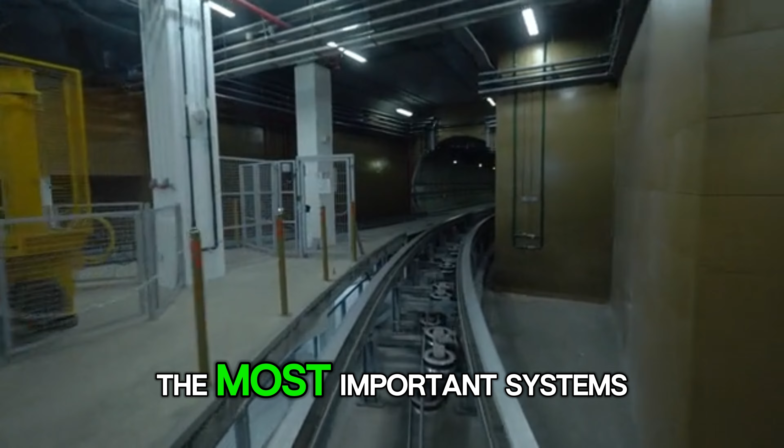Most people think they understand how modern countries develop. They see tall buildings, fast trains, massive factories, and assume that progress is mainly about speed and visibility. But real national-scale engineering does not work like that. The most important systems are often the ones people never notice, systems that operate quietly in the background, supporting everything else without asking for attention.

China's greatest engineering achievements do not always rise into the sky. Many of them run across land, beneath cities, through mountains, and under extreme environmental conditions, working continuously without pause. This video is about one such impossible mega-project, a project that was not built to impress the world, but to keep an entire nation functioning.

China is a country of extremes: extreme population density, extreme industrial demand, and extreme geographical imbalance. Some regions are packed with people, cities, and factories, while other regions hold the resources that those cities depend on. For decades, China tried to manage this imbalance using conventional infrastructure. Roads were expanded, rail networks were multiplied, and transport capacity was increased again and again.

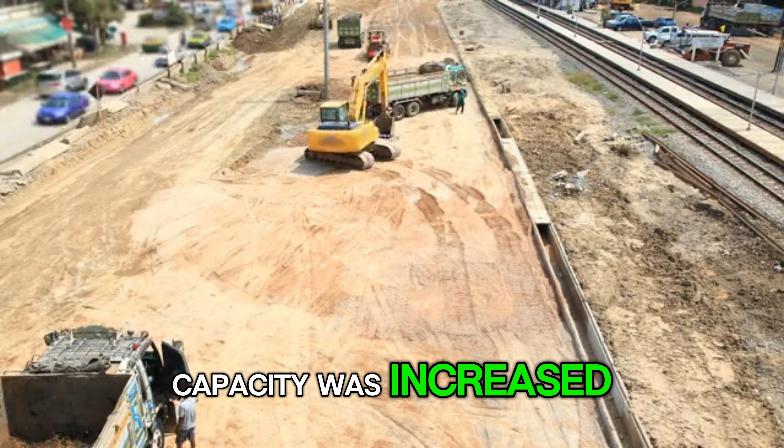But there is a hard limit to how much traditional transportation systems can scale. Trucks consume fuel, trains require schedules, and surface transport is vulnerable to weather, terrain, and congestion. At a certain point, adding more vehicles does not solve the problem. It only makes the system more complex, more fragile, and more expensive to maintain.

This is where Chinese engineers reached a critical realization. The problem was not speed. The problem was discontinuity. Resources were moving in batches instead of flowing continuously. Every stop, every delay, every transfer point introduced inefficiency and risk.

What China needed was not faster transport, but a completely different way of thinking about infrastructure. Instead of asking how to move more resources, engineers asked how to create a system that never stops moving at all, a system that behaves less like transportation and more like a permanent operating organ of the country.

Designing such a system is incredibly difficult because continuous systems do not tolerate failure. A truck can break down and be replaced. A train can be delayed and rescheduled. But a continuous national-scale system must operate every second, day and night, year after year. Even a brief interruption can affect millions of people and cause cascading economic damage.

This meant that the project could not be designed using normal engineering standards. Every assumption had to be questioned, and every component had to be built with worst-case scenarios in mind.

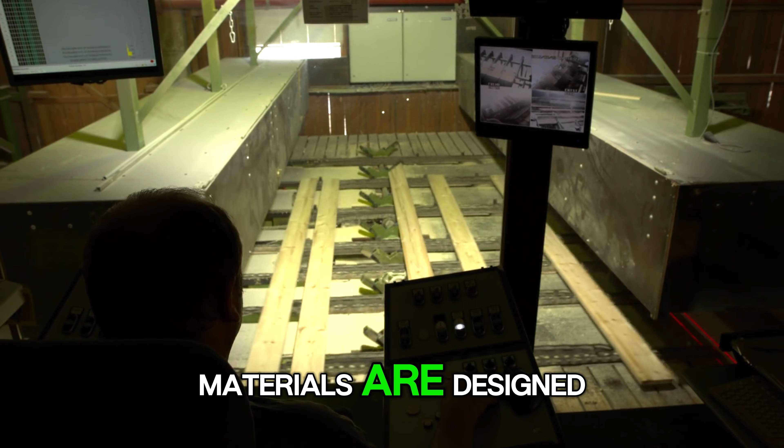One of the first challenges was materials. Standard construction materials are designed for average conditions and scheduled maintenance, but this system would operate under constant stress. Temperature changes would cause expansion and contraction. Ground movement would introduce mechanical strain. Long-term operation would create fatigue that accumulates slowly but relentlessly.

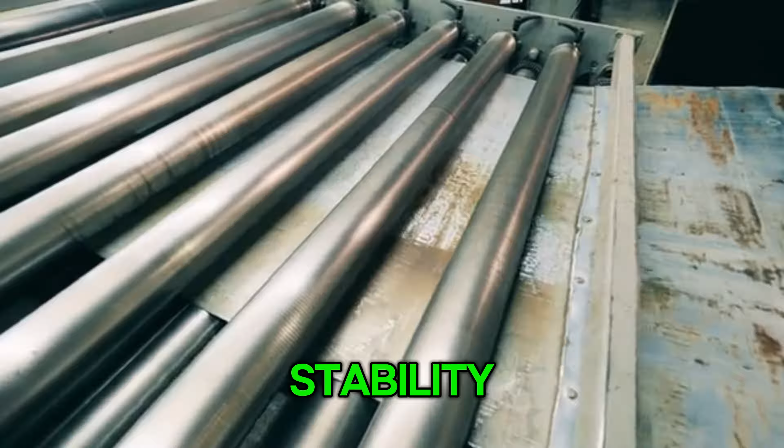Chinese engineers responded by developing custom material standards. Steel alloys were selected not only for strength, but for fatigue resistance and thermal stability. Concrete mixes were adjusted to reduce micro-cracking under repeated stress cycles. Protective coatings were layered to resist corrosion, chemical exposure, and abrasion over decades of use.

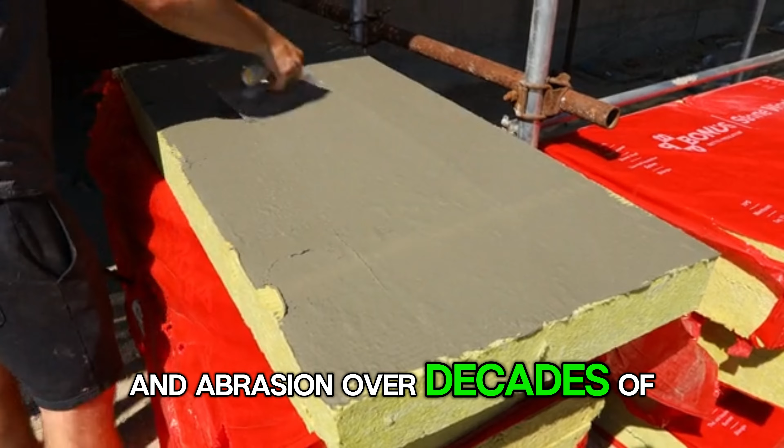Material selection alone was not enough. Structural design had to account for the fact that the system would cross vastly different environments. In some regions, it would pass through deserts, where temperature differences between day and night are extreme. In other regions, it would pass through mountainous terrain where geological stability cannot be guaranteed. In densely populated urban areas, the system would have to coexist with existing infrastructure, buildings, and daily human activity.

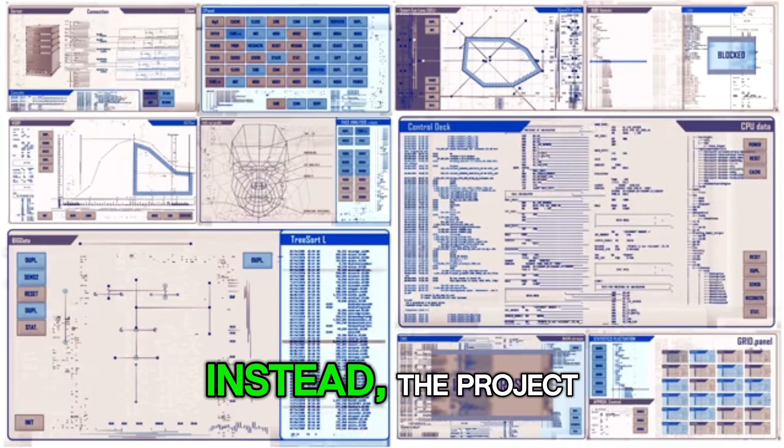There was no single design that could work everywhere. Instead, the project became a collection of localized engineering solutions, each adapted to its specific environment, all integrated into one continuous system. Construction itself became a national-level logistical operation.

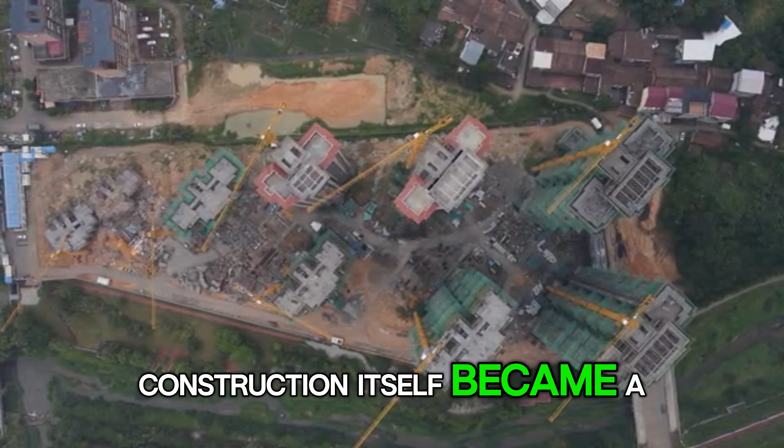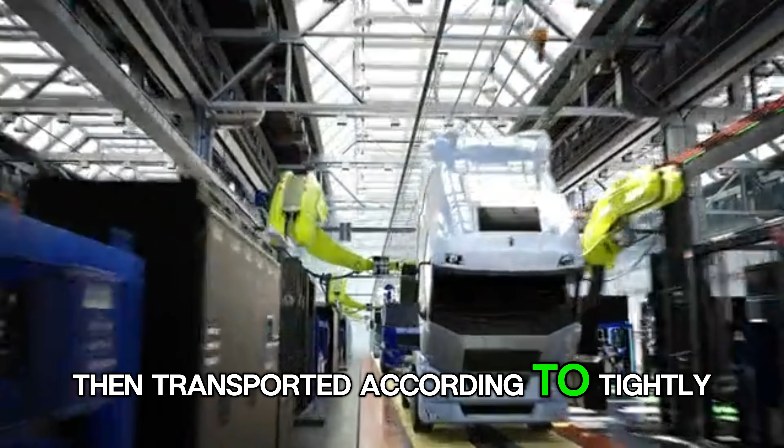This was not a single construction site with a clear beginning and end. It was hundreds of sites operating simultaneously, often hundreds of kilometers apart. Components were manufactured in controlled facilities to ensure precision, then transported according to tightly scheduled logistics plans. Installation followed strict sequences because one section depended on the completion and alignment of another. A mistake in one location could introduce stress or inefficiency that propagated across the entire system. Coordination between engineers, manufacturers, and construction crews had to be flawless.

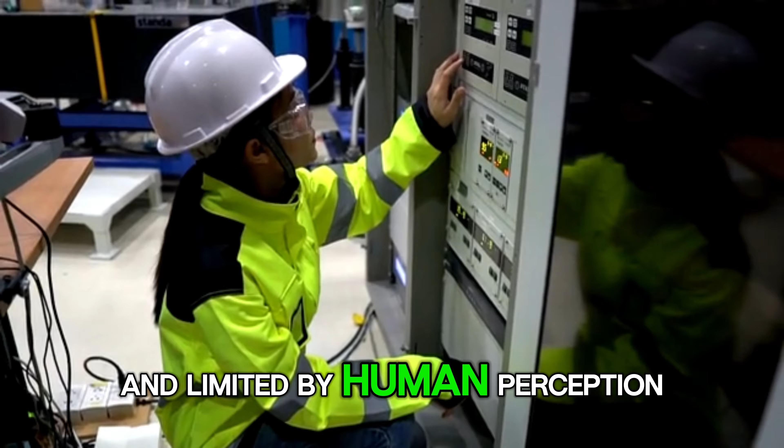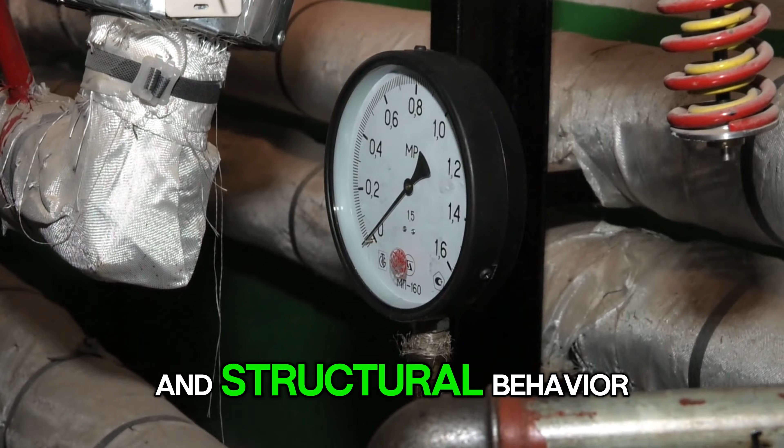Even after construction, the system could not rely on traditional inspection methods. Manual inspection is slow, expensive, and limited by human perception. Instead, China embedded monitoring technology directly into the system itself. Sensors continuously measure pressure, temperature, vibration, and structural behavior. This data is transmitted in real time to centralized control centers, where engineers analyze trends rather than waiting for visible failures.

The goal is not to react to problems, but to predict them before they become dangerous. This approach turns infrastructure into a living system, one that is constantly observed, evaluated, and adjusted. What makes this project truly remarkable is not any single technical feature, but the philosophy behind it.

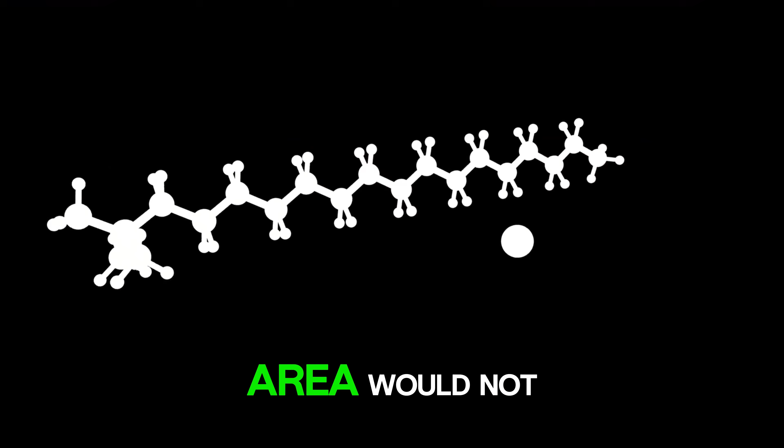China did not treat this as a construction challenge. It treated it as a long-term systems problem. Every decision was evaluated not just for initial cost, but for lifetime performance, reliability, and resilience. Redundancy was built into critical components so that failure in one area would not bring down the entire system. This level of redundancy is expensive, but at national scale, downtime costs far more than prevention.

This impossible mega-project represents a shift in how modern nations think about infrastructure. It is not designed for visibility or prestige. It is designed for endurance. It is designed to operate quietly, efficiently, and continuously, supporting everything else without drawing attention to itself. And that is precisely why most people never notice it. But without it, the visible achievements of modern China simply would not be possible.

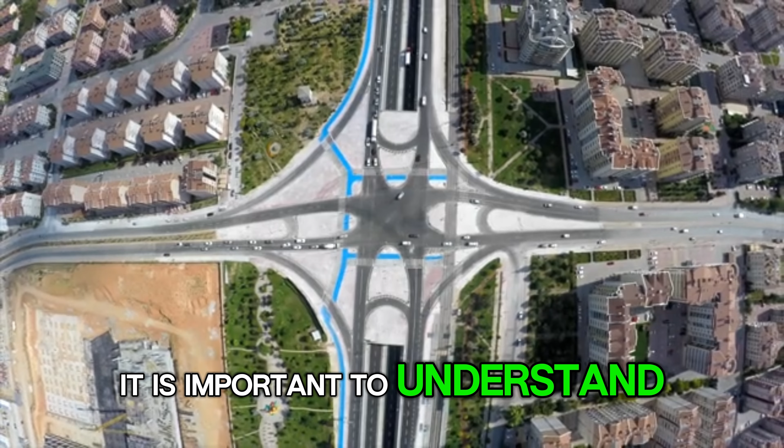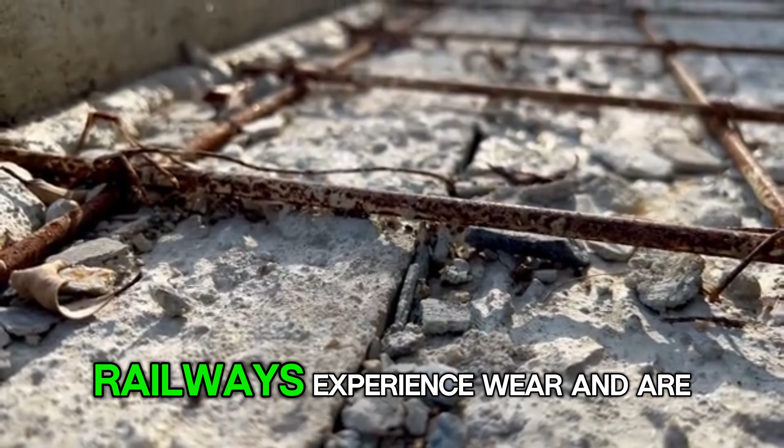To understand why this mega-project could not be built using conventional methods, it is important to understand how normal infrastructure is designed. Most infrastructure around the world is built with the assumption that problems will occur and that those problems will be fixed later. Roads develop cracks and are repaired. Railways experience wear and are shut down for maintenance. Power systems experience outages and are restored. These systems are designed around interruption.

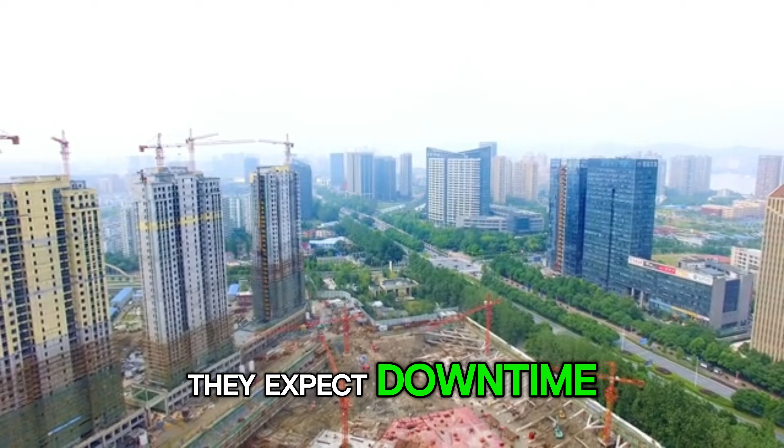They expect downtime. China's project could not afford that luxury. Interruption was not an acceptable outcome. This single constraint changed every engineering decision from the ground up.

One of the most difficult aspects of designing a continuous national-scale system is dealing with uncertainty. Environmental conditions are never perfectly predictable. Temperatures fluctuate. Ground shifts slowly over time. Materials age. When infrastructure is small, uncertainty can be managed locally. But when a system stretches across vast distances, uncertainty accumulates. Small deviations become large problems.

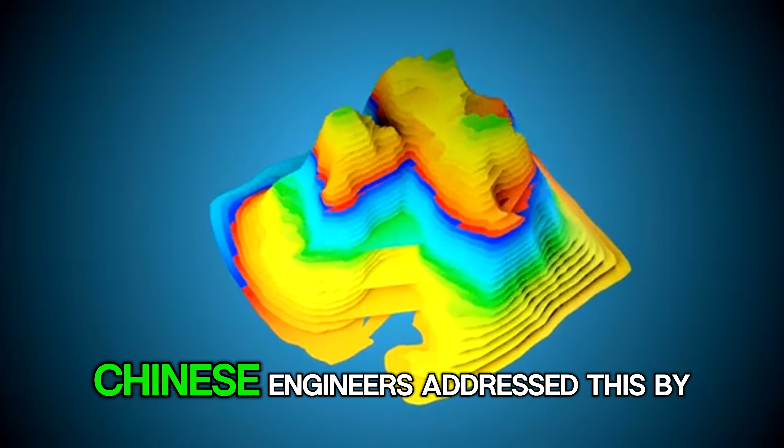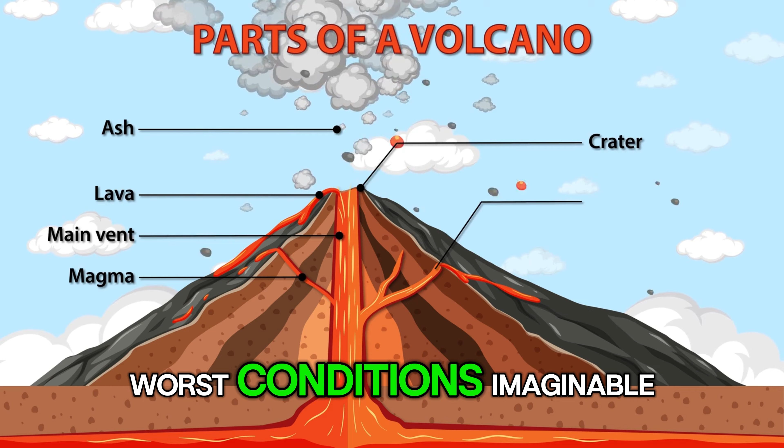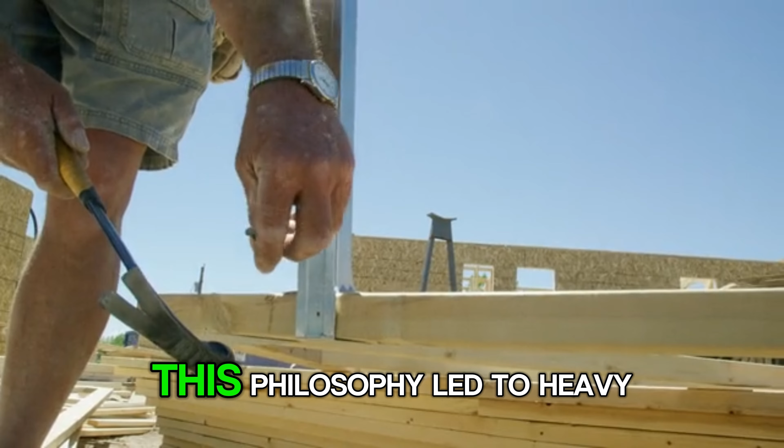Chinese engineers address this by designing for extremes rather than averages. Instead of asking how the system would behave under normal conditions, they asked how it would behave under the worst conditions imaginable. Earth movement, heat waves, prolonged stress cycles, and long-term material fatigue were treated as baseline assumptions, not rare exceptions. This philosophy led to heavy over-engineering in many areas.

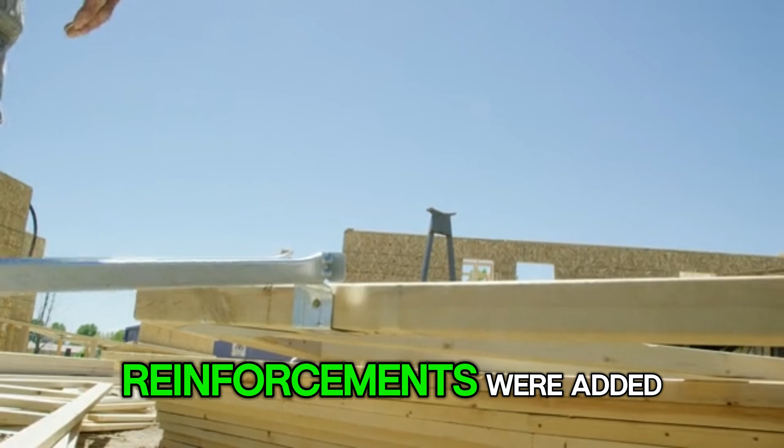Components were designed with safety margins far beyond what would normally be considered economical. Thicknesses were increased. Reinforcements were added. Joints were redesigned to allow controlled movement instead of rigid resistance. This approach increases initial cost, but it dramatically reduces the probability of catastrophic failure. In systems where failure can disrupt an entire nation, prevention is always cheaper than repair.

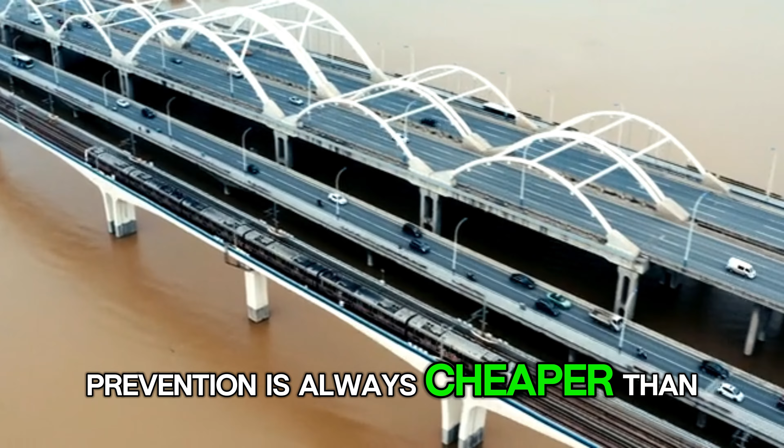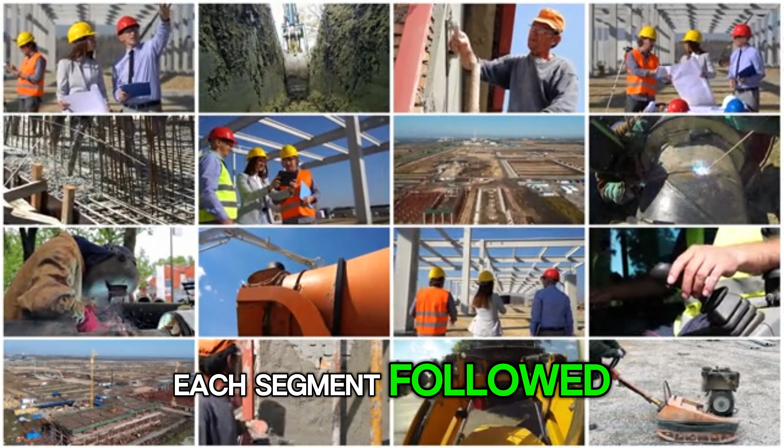Construction planning became as important as engineering design. Because the project spanned enormous distances, construction could not proceed linearly from one end to the other. Instead, it was divided into segments that could be built simultaneously. Each segment followed identical engineering standards, but local conditions required local adaptation. Construction teams had to operate with a high degree of autonomy while still maintaining strict alignment with the overall system design. This balance between central control and local flexibility is extremely difficult to achieve, and it required an unprecedented level of coordination.

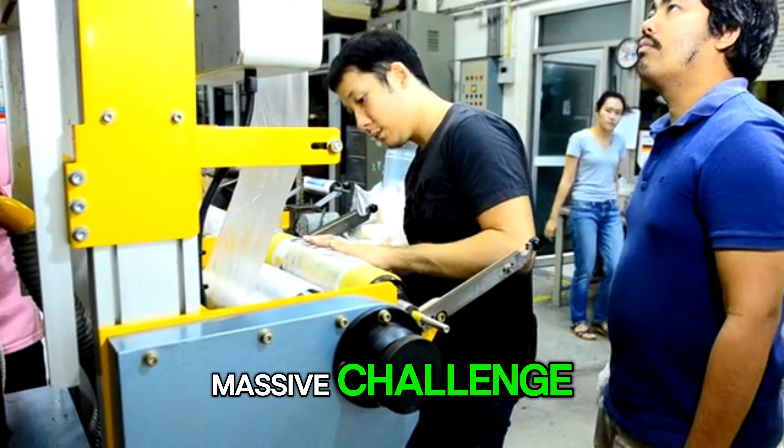Logistics posed another massive challenge. The materials used in this project were not standard off-the-shelf components. Many were custom manufactured to precise specifications. This meant that supply chains had to be carefully synchronized with construction schedules. Delivering components too early created storage problems. Delivering them too late caused delays that could ripple across the entire system. In harsh environments, such as deserts or remote mountainous regions, even basic logistics like fuel, water, and worker accommodation became complex engineering problems in their own right.

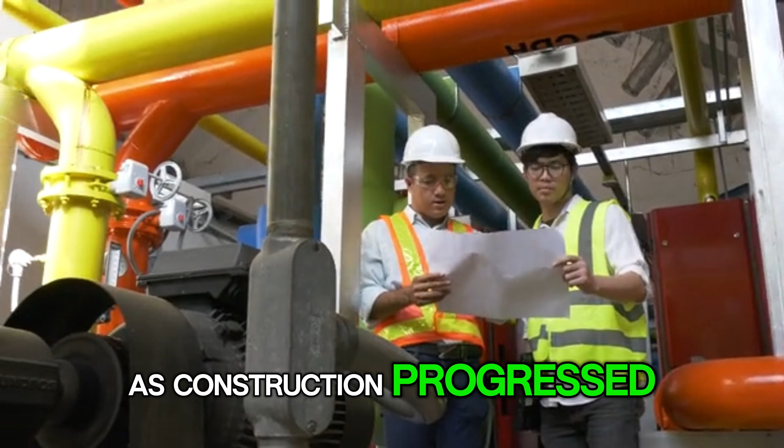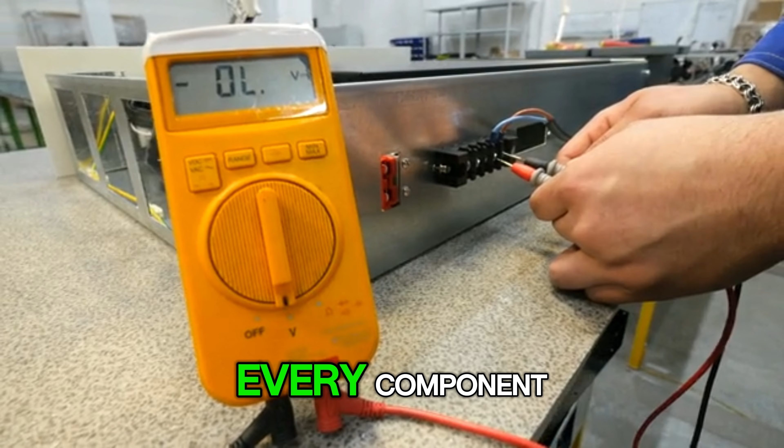As construction progressed, quality control became a central concern. In smaller projects, defects can sometimes be tolerated or corrected later. In these systems, defects could not be allowed to accumulate. Every component had to meet strict performance criteria before installation. Inspection processes were integrated directly into construction workflows.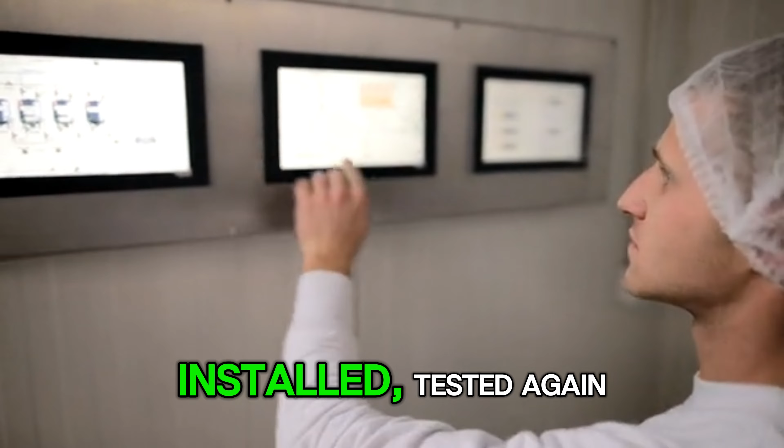Components were tested, installed, tested again, and monitored continuously from the moment they became operational. This level of scrutiny slowed construction, but it ensured long-term reliability.

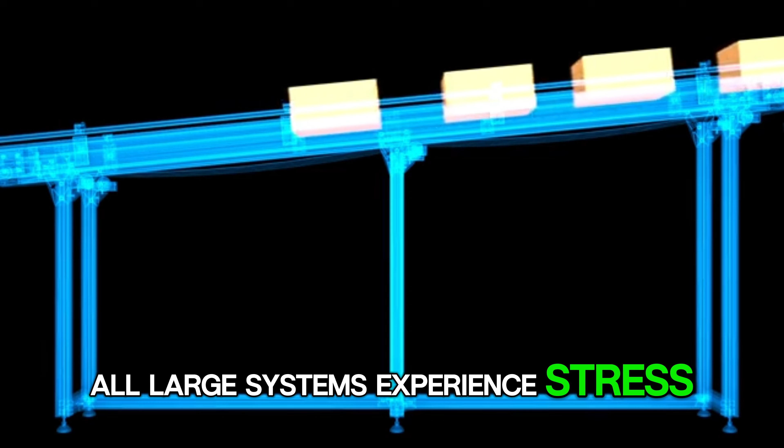One of the defining features of this project is how it handles stress. All large systems experience stress, whether mechanical, thermal, or operational. The question is not whether stress exists, but how it is managed. Instead of attempting to eliminate stress entirely, Chinese engineers designed the system to distribute stress evenly.

Flexible elements absorb movement. Expansion mechanisms accommodate temperature changes. Structural continuity prevents localized overloads. This approach reduces the likelihood of sudden failure and allows the system to age gracefully rather than deteriorating rapidly.

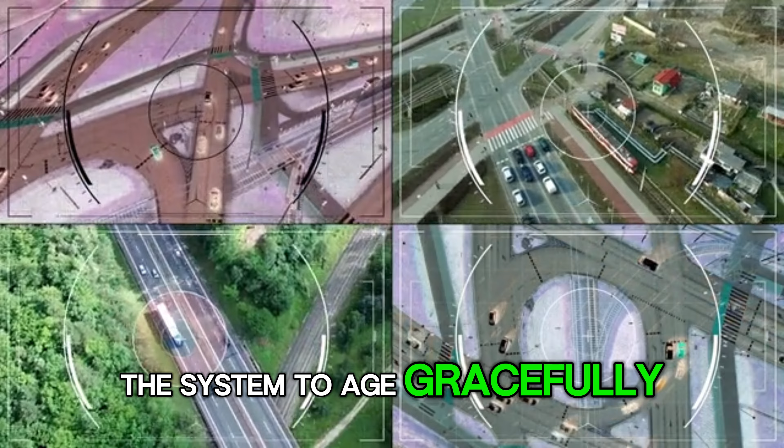Automation plays a crucial role in maintaining this balance. Human operators are excellent at making complex decisions, but they are not well suited to continuous monitoring over long periods. Machines, on the other hand, excel at detecting small changes that humans might miss.

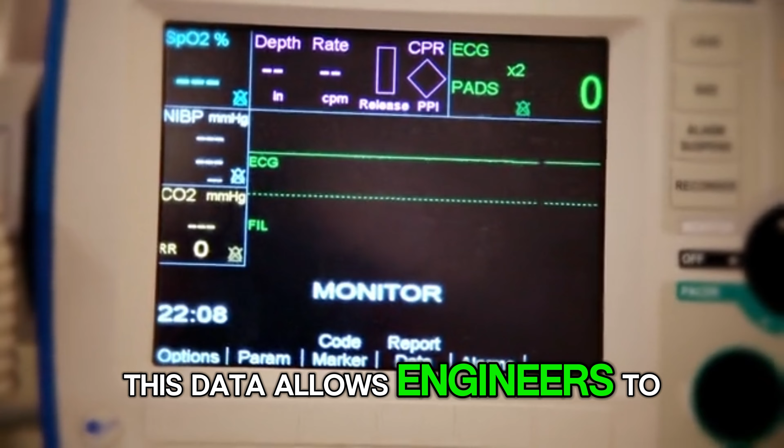By embedding sensors throughout the system, engineers created a constant feedback loop. The system continuously reports its own condition. Pressure variations, temperature shifts, and structural responses are all tracked in real time. This data allows engineers to intervene early, often before any visible problem appears.

However, automation alone is not enough. Data must be interpreted, and interpretation requires expertise. Control centers staffed by engineers analyze incoming information and make strategic decisions.

Maintenance is planned based on predictive models rather than emergency response. This shift from reactive to proactive maintenance is one of the key reasons the system remains stable over time. Problems are addressed while they are still small, preventing them from escalating into failures.

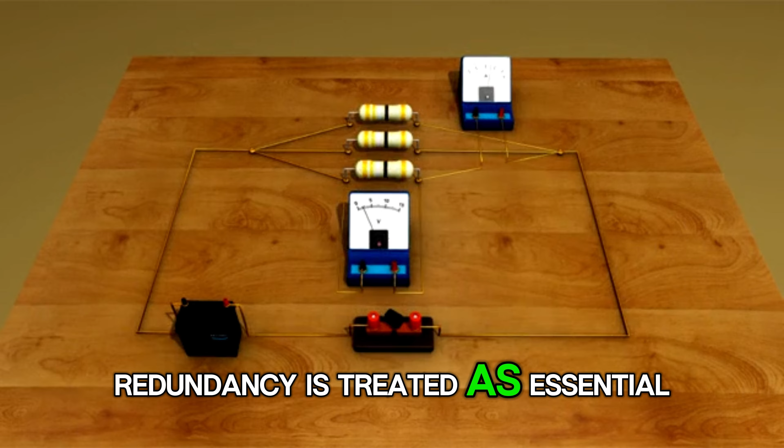Redundancy is another critical feature. In conventional infrastructure, redundancy is often limited due to cost constraints. In this project, redundancy is treated as essential. Critical components are duplicated. Alternative pathways exist to reroute flow if necessary.

Control systems are backed up by independent systems. This means that even if one part of the system is compromised, overall operation can continue. Redundancy increases complexity, but it dramatically increases resilience.

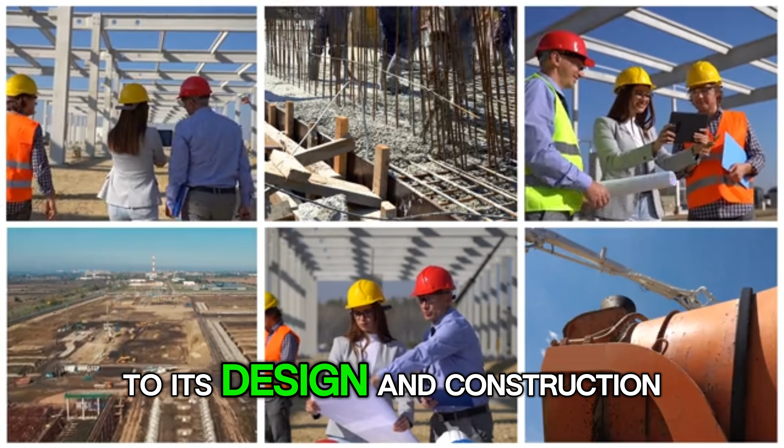What is often overlooked is the human dimension of this project. Despite its scale and automation, it is not a purely mechanical system. Thousands of engineers, technicians, and planners contributed to its design and construction. Their experience informed countless small decisions that never appear in official documentation.

Choosing one material over another, adjusting a design to account for local conditions, anticipating a problem before it becomes measurable. These human judgments are embedded throughout the system, even though they are invisible once construction is complete.

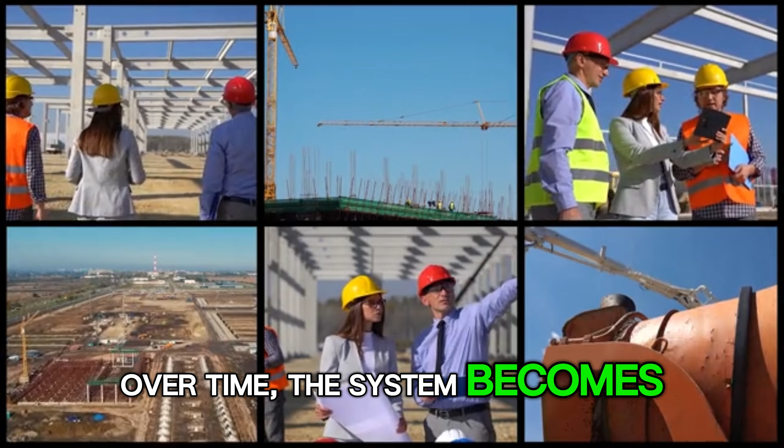Over time, the system becomes more than infrastructure. It becomes institutional knowledge. Lessons learned during construction inform future projects. Standards developed for this system influence national engineering practices.

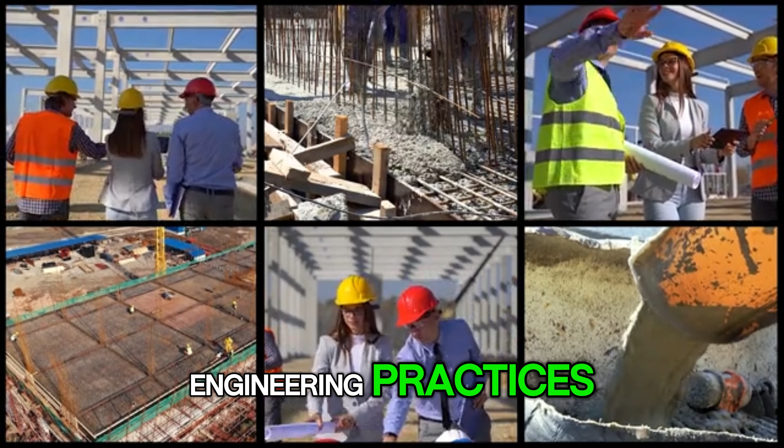In this way, the project does not just solve an immediate problem. It reshapes how China approaches large-scale engineering challenges in general. By the time this project reached full operation, it had already changed the way Chinese engineers think about infrastructure.

It demonstrated that with enough planning, coordination, and long-term vision, it is possible to build systems that operate continuously at national scale. Systems that do not rely on constant repair. Systems that are designed not just to work, but to endure. And this is only one part of the story.

Once a project of this scale becomes operational, the real challenge begins. Building the system is only the first step. Keeping it running smoothly for years and decades is where most large infrastructure projects fail.

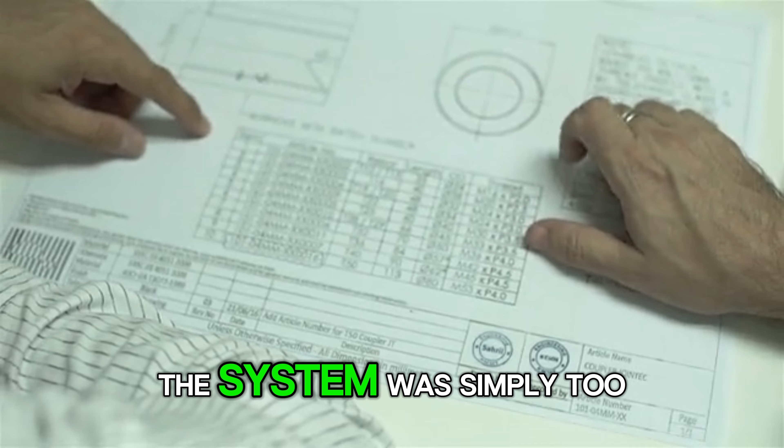China's engineers understood this from the very beginning. They knew that long-term stability could not depend on human observation alone. The system was simply too large, too complex, and too continuous to be managed using traditional inspection methods. This is why monitoring and automation were treated not as optional upgrades, but as core structural elements of the project.

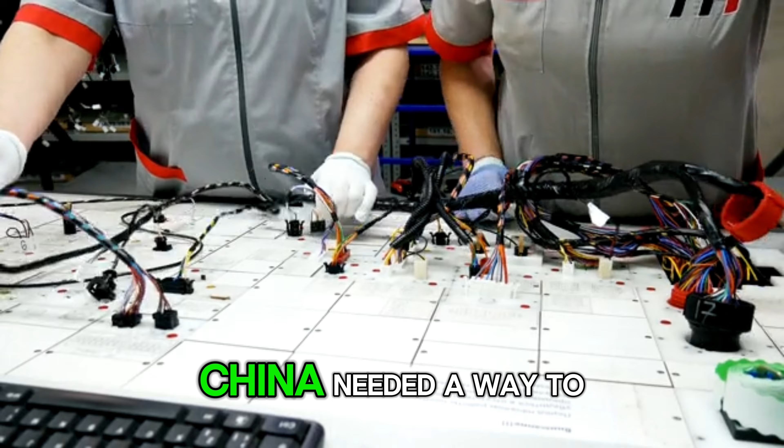In conventional infrastructure, monitoring is often reactive. A problem appears, someone reports it, and engineers respond. This approach does not work when failures can spread rapidly across a national system. China needed a way to see problems before they became visible.

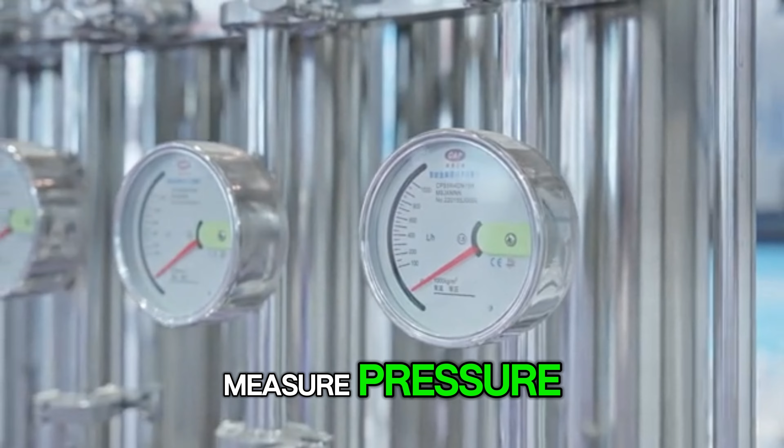To achieve this, engineers embedded thousands of sensors directly into the structure itself. These sensors continuously measure pressure, temperature, vibration, deformation, and operational performance. Individually, each measurement may seem insignificant, but when analyzed together over time, they reveal patterns that indicate how the system is behaving internally. The real power of this monitoring network lies in data continuity.

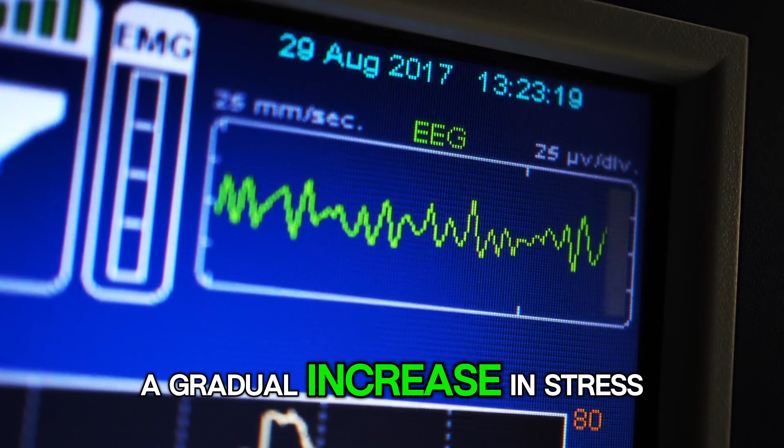The system does not generate snapshots. It generates streams. Every second of operation adds to a growing history of information. Engineers do not just look for sudden spikes or obvious anomalies. They look for slow trends. A gradual increase in stress, a subtle change in temperature response, a minor shift in vibration frequency. These small changes often indicate deeper structural processes that would be invisible without long-term data.

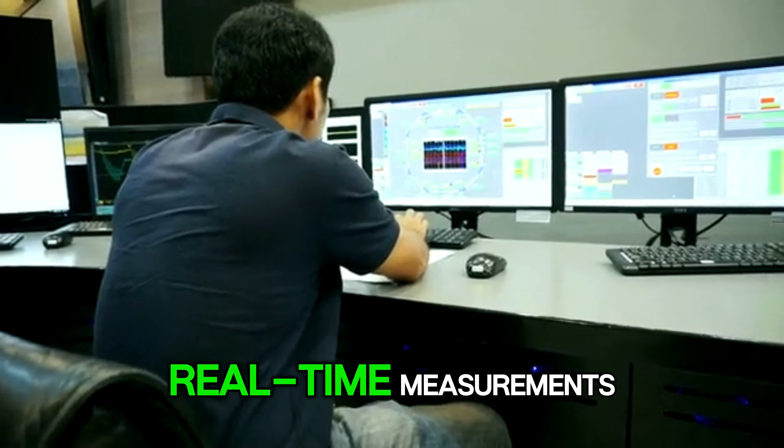Automation turns this data into action. Control systems constantly compare real-time measurements with predictive models. When values drift outside expected ranges, alerts are generated.

But these alerts do not automatically trigger shutdowns. Instead, they prompt analysis. Engineers evaluate whether the change represents normal variation, environmental influence, or the early stages of a potential failure. This layered decision-making process prevents unnecessary intervention while ensuring that genuine risks are addressed early.

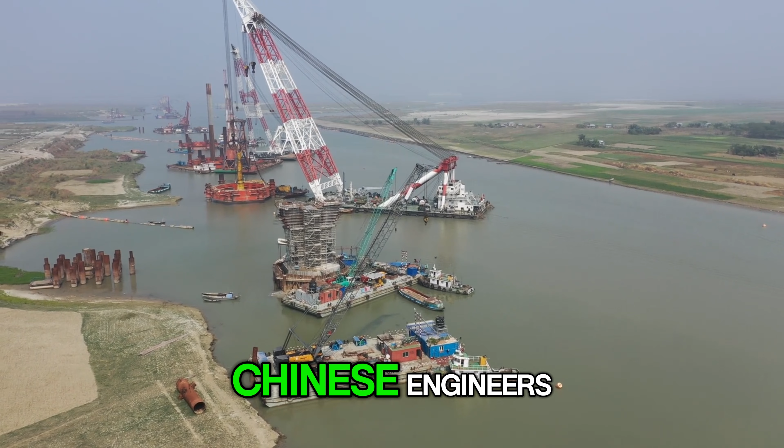One of the most important aspects of this system is how it handles failure scenarios. Chinese engineers did not design the project with the assumption that nothing would ever go wrong. They assumed the opposite: that components would eventually degrade, that unexpected events would occur, and that rare extreme conditions would be encountered.

The system was designed to absorb these events without collapsing. This is achieved through redundancy, segmentation, and isolation.

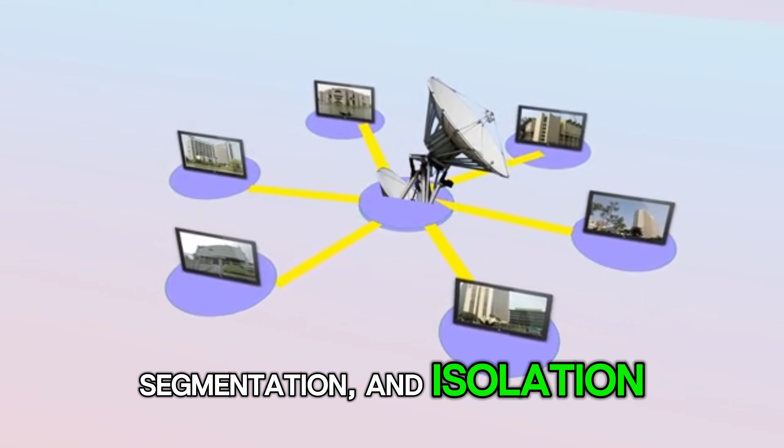Redundancy ensures that no single component is critical to overall operation. If one element fails or requires maintenance, another can temporarily take its place.

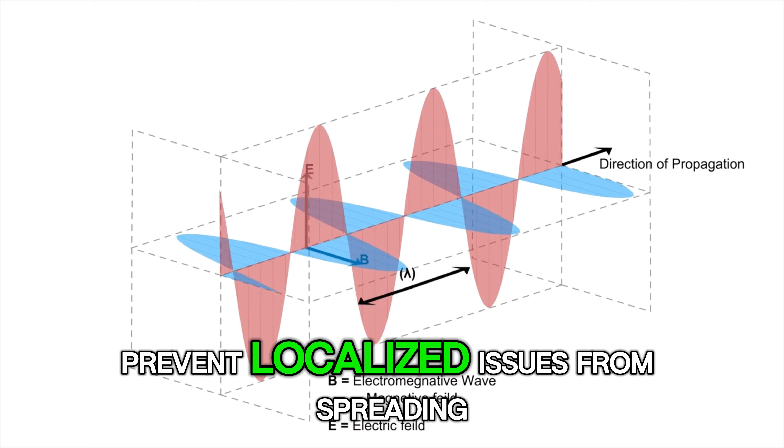Segmentation allows the system to be divided into manageable sections. If a problem occurs in one segment, it can be isolated without affecting the rest of the system. Isolation mechanisms prevent localized issues from spreading, protecting the integrity of the whole.

Together, these features transform potential failures into manageable events rather than catastrophic disruptions.

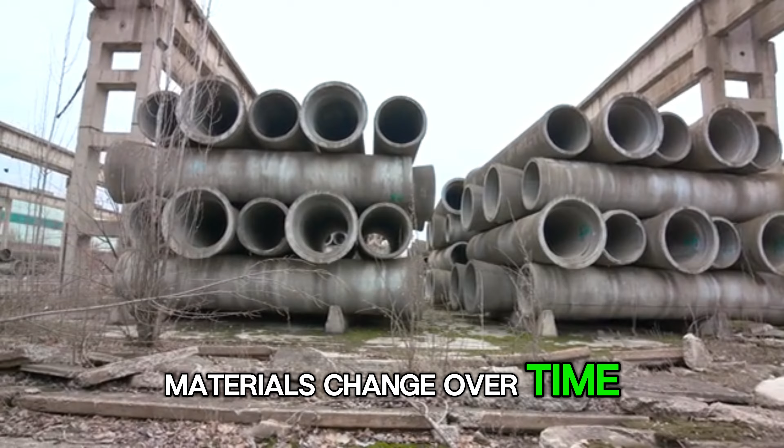Long-term operation also introduces the challenge of aging. Materials change over time. Metals fatigue. Coatings degrade. Environmental exposure accumulates. China's engineers accounted for this by designing maintenance into the system from the start.

Instead of waiting for components to fail, maintenance schedules are based on predictive analysis. Data from sensors is used to estimate remaining service life. Components are serviced or replaced before they reach critical thresholds. This approach reduces downtime, lowers repair costs, and extends the overall lifespan of the system.

Another critical factor is adaptability. No matter how carefully a system is designed, future conditions will never exactly match original assumptions.

Economic demand changes. Environmental patterns shift. New technologies emerge. China's project was built with the expectation that it would need to evolve.

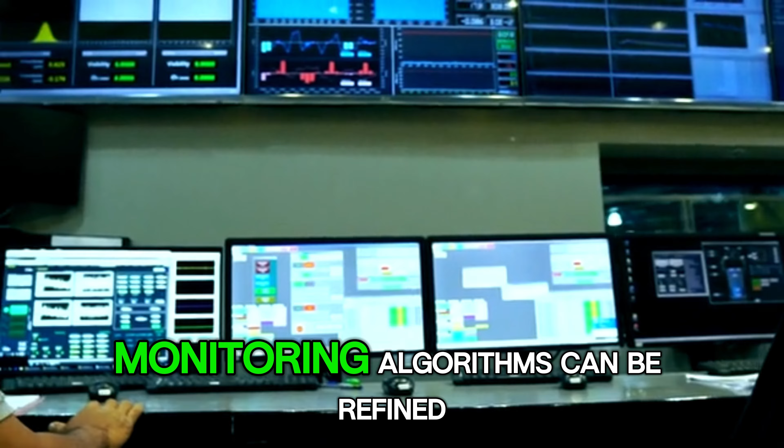Control software can be updated. Monitoring algorithms can be refined. Operational strategies can be adjusted. This flexibility allows the system to remain relevant and efficient even as external conditions change.

Human expertise remains central to this process. Automation handles continuous monitoring and routine responses, but strategic decisions require human judgment. Engineers interpret complex data patterns, weigh trade-offs, and decide when and how to intervene.

Training programs ensure that knowledge is transferred across generations of operators. Documentation captures lessons learned from real-world operation. In this way, the system accumulates not only physical resilience, but intellectual resilience as well.

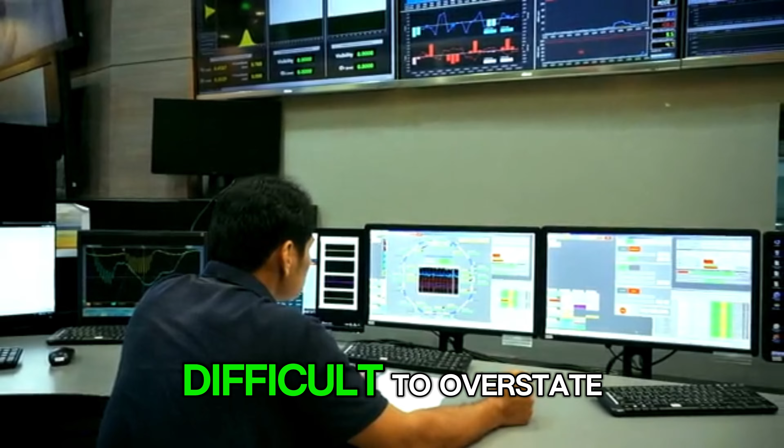The scale of coordination required to operate this project is difficult to overstate. Control centers communicate with regional teams. Maintenance schedules are synchronized with operational demands. Data flows across organizational boundaries.

This requires standardized protocols, clear authority structures, and robust communication systems. Any ambiguity could lead to delays or conflicting decisions.

China addressed this by integrating technical design with institutional design. The organizational structure supporting the system was engineered as carefully as the system itself.

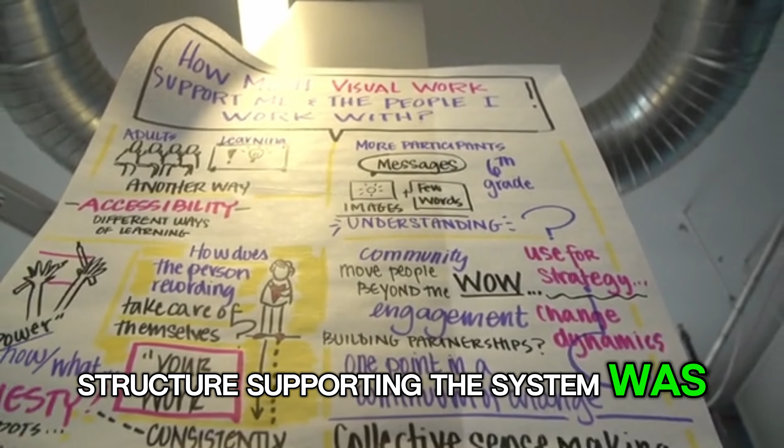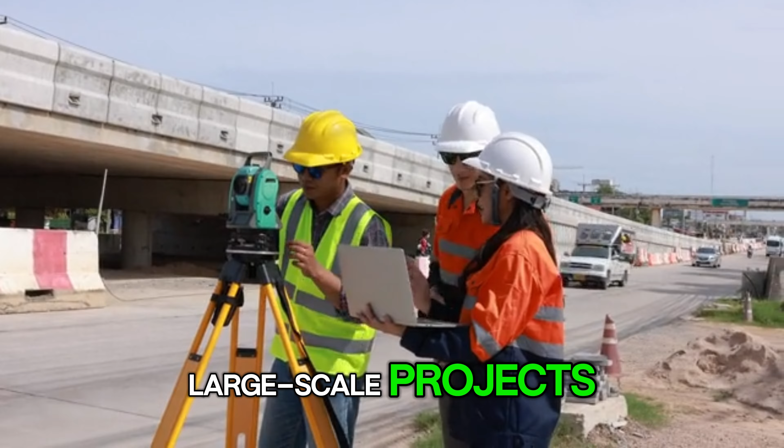Over time, the project has become a reference point for future infrastructure development. Techniques developed here influence other large-scale projects. Monitoring strategies are reused. Material standards are refined and applied elsewhere.

The project becomes a learning platform, generating knowledge that extends far beyond its original purpose.

This is one of the hidden benefits of building at such scale. Each challenge overcome expands the country's engineering capability.

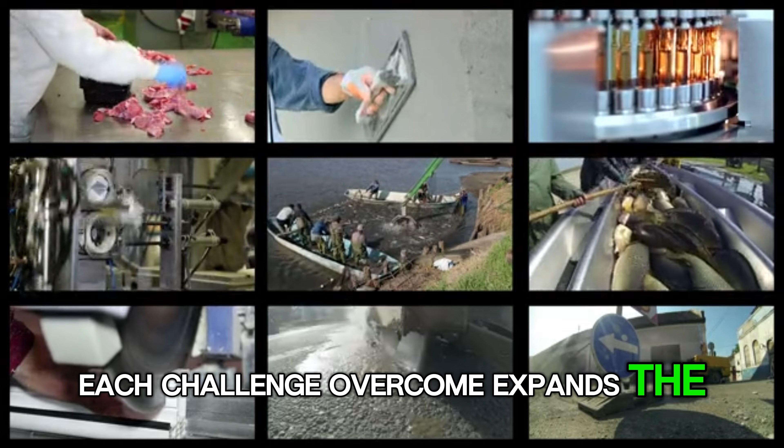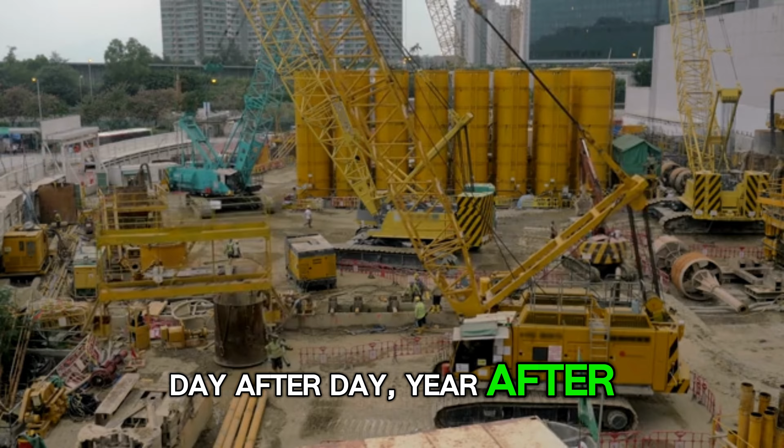Perhaps the most remarkable aspect of this mega project is how unremarkable it appears in daily life. It does not demand attention. It does not announce its presence. It simply works, day after day, year after year. This quiet reliability is not accidental.

It is the result of thousands of design decisions, countless hours of analysis, and a philosophy that prioritizes endurance over spectacle. By the time most people notice infrastructure, it has already failed. This project was designed so that people would never have to notice it at all, and that may be its greatest success.

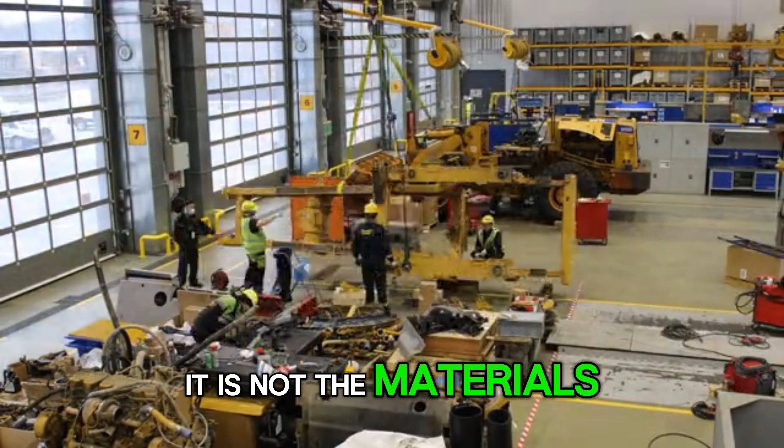When we step back and look at this impossible mega project as a whole, it becomes clear that its true achievement is not any single technical innovation. It is not the materials, the machines, the sensors, or even the scale.

The real achievement lies in how all of these elements were integrated into one coherent system.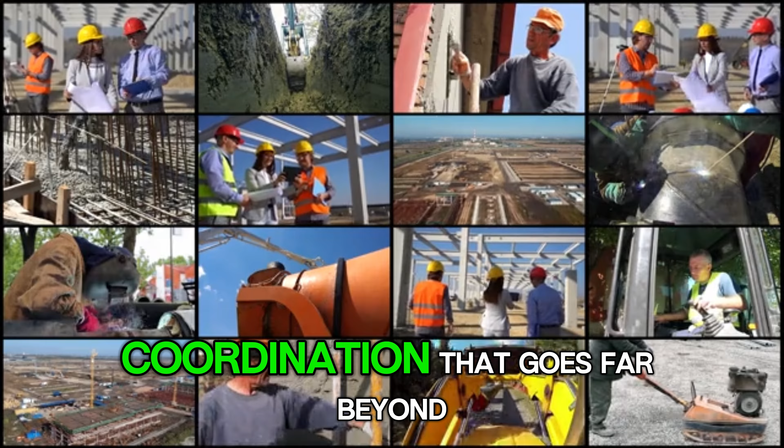This project represents a level of coordination that goes far beyond construction. It is coordination between geography and engineering, between technology and human decision-making, and between short-term execution and long-term vision.

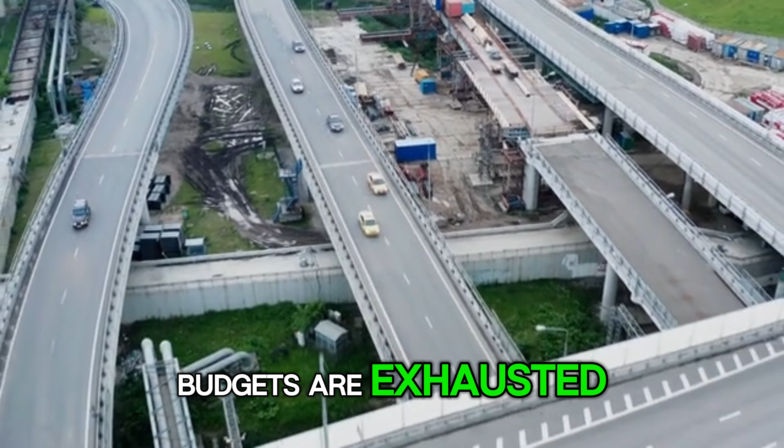Most countries struggle to maintain infrastructure over time. Projects are built, budgets are exhausted, and maintenance becomes an afterthought. Over years, systems degrade, efficiency drops, and failures become more frequent.

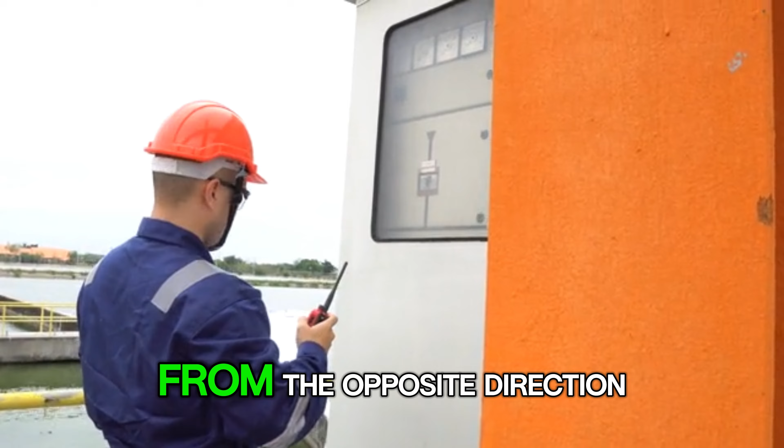China approached this project from the opposite direction. Maintenance was not something added later. It was embedded into the system from the very beginning. Every design decision considered how the system would behave not just in its first year, but in its 20th and 30th year of operation.

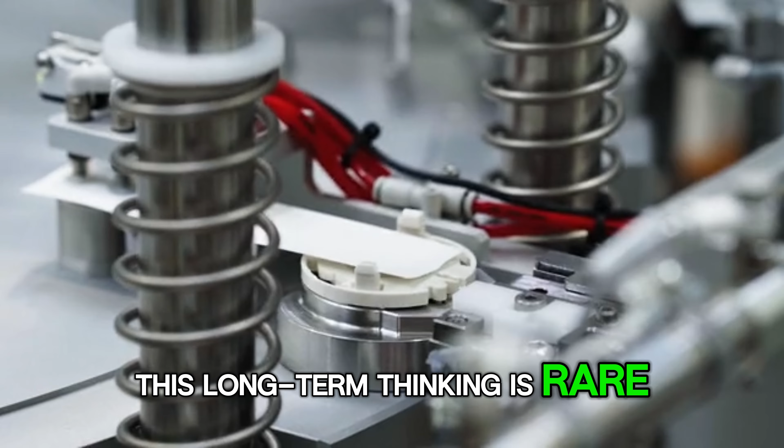This long-term thinking is rare, and it is one of the reasons this project continues to function reliably. Another critical lesson from this project is the importance of accepting complexity rather than avoiding it. The simplest systems are easier to understand, but they are often less resilient.

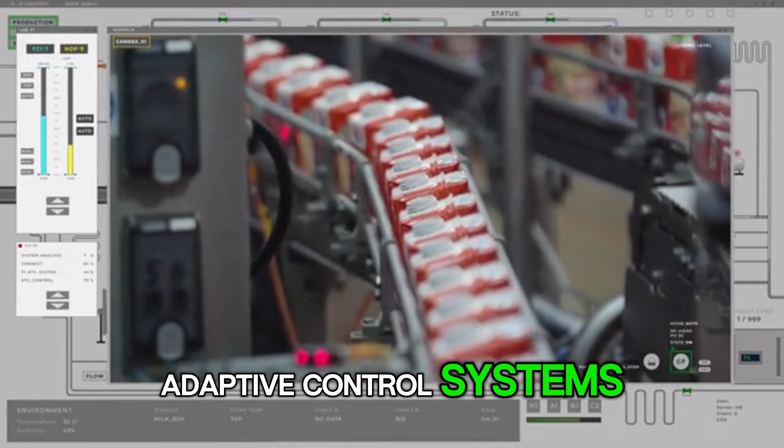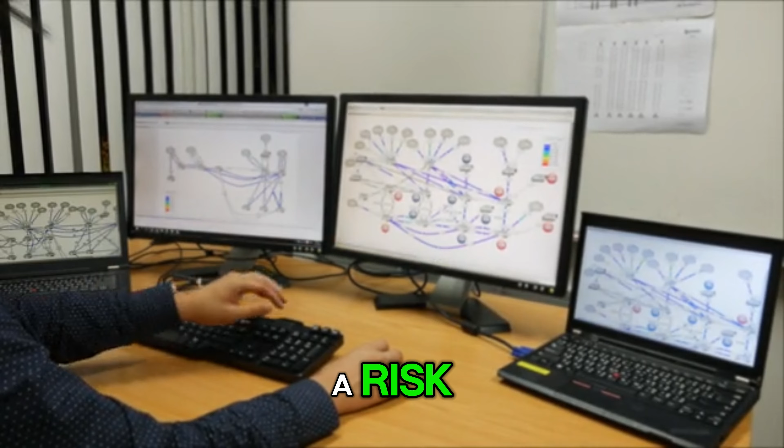China chose to embrace complexity where it added value. Redundant pathways, layered monitoring, adaptive control systems, and flexible structural elements all increase complexity, but they also increase the system's ability to survive unexpected conditions. Complexity was not treated as a risk.

This project also challenges the idea that infrastructure must always be visible to be meaningful. Many of the world's most famous engineering achievements are celebrated because they can be seen. Bridges, towers, and monuments attract attention because they dominate the landscape. But this project operates largely out of sight.

Its success is measured not in photographs, but in uninterrupted operation. People do not stop to admire it because there is nothing dramatic to see. And yet, it supports millions of lives every single day. This quiet reliability may be the highest form of engineering success.

There is also an important institutional lesson here. Engineering alone is not enough to sustain a system of this scale. Organizational structures, training programs, and decision-making processes are just as critical. China invested heavily in building teams capable of understanding and operating this system over the long term.

Knowledge was documented, shared, and updated. Experience gained during operation fed back into design improvements. This created a cycle of continuous learning, ensuring that the system evolves rather than stagnates.

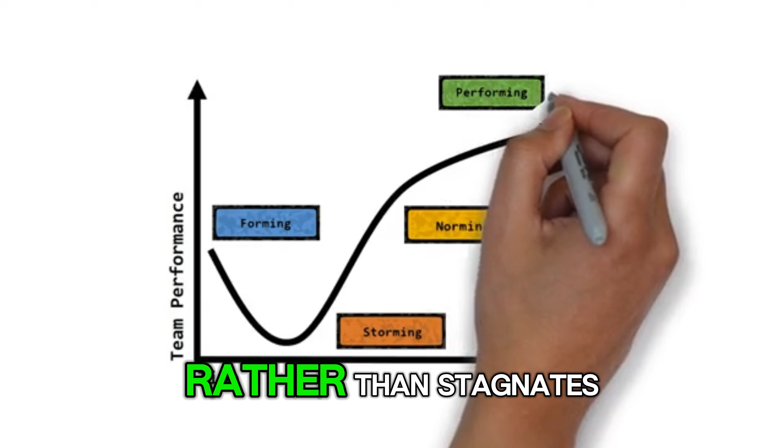Over time, this mega project has become more than infrastructure. It has become a foundation for future development. The technologies tested here influence new projects. The standards developed here become national benchmarks. The confidence gained here enables even more ambitious undertakings.

In this way, the project extends its impact far beyond its original purpose. It becomes a platform for growth, experimentation, and innovation.

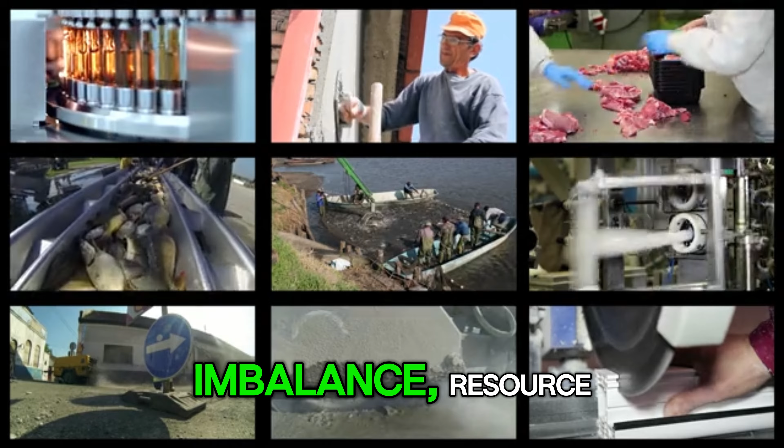What makes this especially significant is that the project was not built during a moment of abundance or ease. It was built in response to real constraints. Geographic imbalance, resource pressure, and growing demand forced China to confront problems that could not be solved incrementally. This necessity drove innovation. When incremental solutions fail, systems-level thinking becomes unavoidable.

China's response demonstrates what is possible when a nation commits fully to solving a problem rather than postponing it. From an engineering perspective, this project redefines what it means to build at scale.

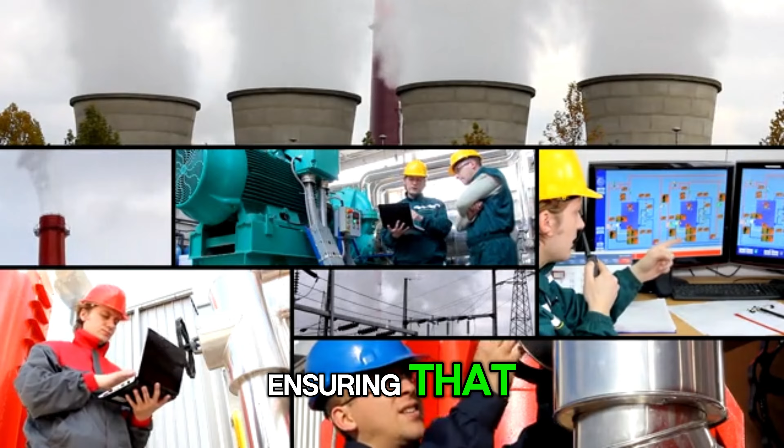Scale is not just about size. It is about integration. It is about ensuring that thousands of components behave as one system. It is about aligning materials, machines, software, and people toward a single operational goal. This level of integration is extremely difficult to achieve, and it requires patience, discipline, and long-term commitment.

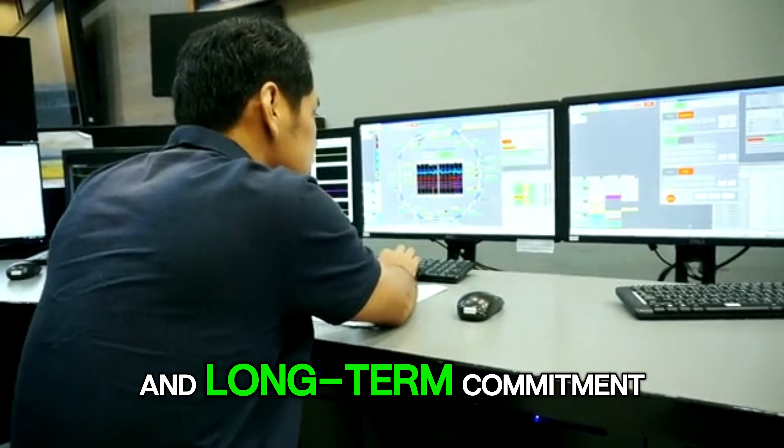For viewers trying to understand why this project matters, the key takeaway is simple. Modern civilization depends on systems that we rarely think about. When those systems work, life feels normal. When they fail, everything stops.

The difference between stability and crisis often lies in decisions made years or decades earlier. This project shows what happens when those decisions are made with care, foresight, and respect for complexity.

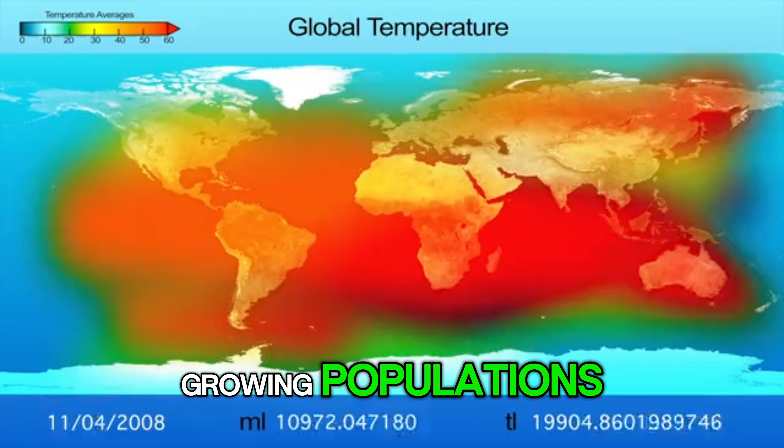As global challenges increase, more countries will face similar problems. Growing populations, uneven resource distribution, climate pressure, and infrastructure aging are not unique to China. They are global issues. Projects like this offer a glimpse into how future societies might respond, not with quick fixes or isolated solutions, but with integrated systems designed to endure.

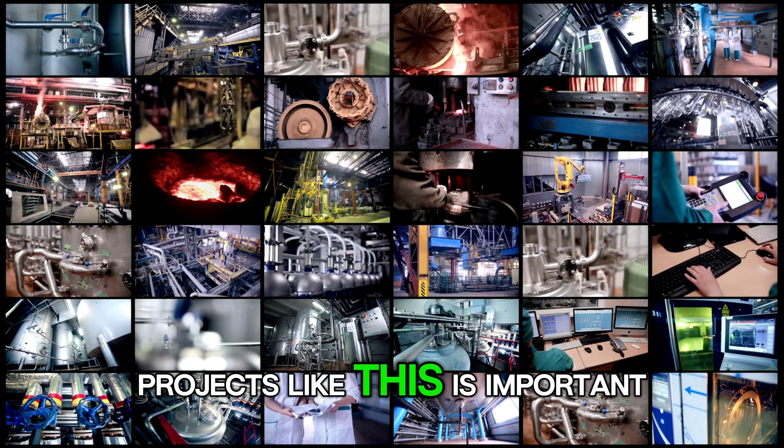This is why understanding projects like this is important. Not because we will all build identical systems, but because the principles behind them apply everywhere. Long-term thinking, preventive maintenance, data-driven operation, and respect for uncertainty are universal lessons. They represent a shift from reactive problem-solving to proactive system design.

And perhaps the most important lesson is this: the most powerful engineering achievements are not always the ones that look impressive. They are the ones that quietly keep working, day after day, without demanding recognition. This impossible mega project does exactly that. It works, and in doing so, it supports everything else.